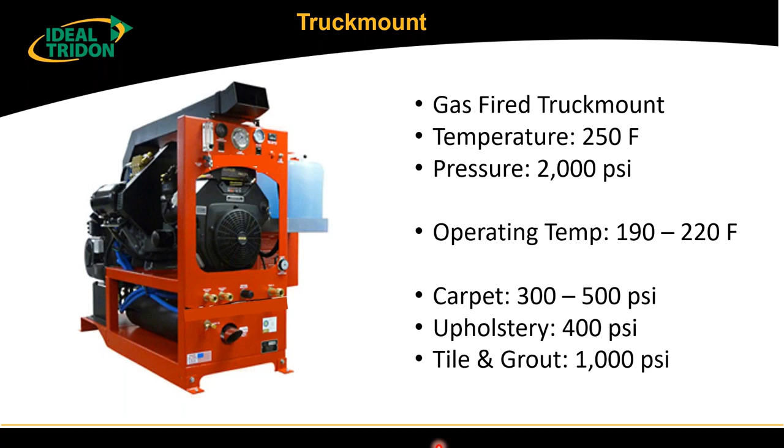So I'm going to lead you to the Holy Grail today, and we got some exciting stuff, but it may not have been the one that you were truly in search of. But in the carpet cleaning world, this is golden. And if you kind of see this and understand this, you'll understand the mindset of the people out in the industry. So for every 18-degree increase in temperature above 118 degrees Fahrenheit, you double the water's cleaning ability.

So what that means to them is the hotter the temperature, the faster I get the job done, the more customers I see, the easier that the work is. So they want it to be easy. They want to be seeing more customers, collecting more revenue.

So just to put that law into perspective, if they bump it from 118 to 136, they double their cleaning power. If they go to 154, they double it again over 136. So if you take it all the way up to 250, that's 64 times better than 118 degrees Fahrenheit.

So now you kind of see these maniacs out there, they want hot temperature, they want this pressure, they want to get that job done, get it done fast, have it done good. So some will be extreme on the temperature and pressure. Others will say, let's get an optimum setting of pressure and temperature, because the hotter you get, the potential that you have for an accident if a hose bursts increases. And somebody could get hurt, or hot water at high pressure sprays out and causes damage. So there's different ways that people operate.

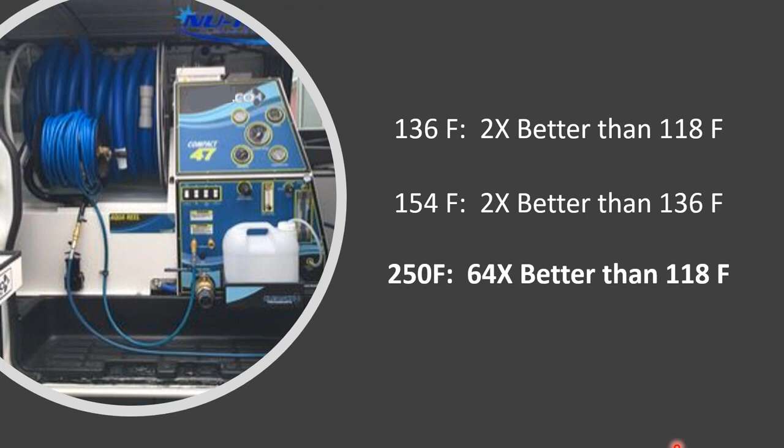So here's our truck mount mobile van, wanting to park as close as they can. Sometimes it's in the front, sometimes it's in the driveway. They want their lines to be nice and straight so they get better pressure and temperature delivered on site.

So here's our hot water line, and there could be cleaning chemicals in there. It's pressurized, if it's at 500 PSI. One of the popular hoses they use, it's an excellent one, is the Goodyear Neptune 3000, called the solution hose. There's also one for washdown, but this one goes to higher pressures and up to 250 degrees Fahrenheit. People like this hose because it's lighter, more flexible, and non-marking on the floor. You don't want to be causing damage to the floors you're cleaning or other items in the residence or commercial building.

So what's at the other end of this solution hose? Well, that's what they carry into the farthest room they're going to clean. It's called a wand. That's where the solution or high pressure water comes in and gets sprayed onto the carpet down below, and the return vacuum line sucks up the water that was placed on the floor. So this goes down to the jets, we've got a handle here. Notice the valve actuator is rated 1200 PSI, and our plug on the quick connect is more than twice that rating.

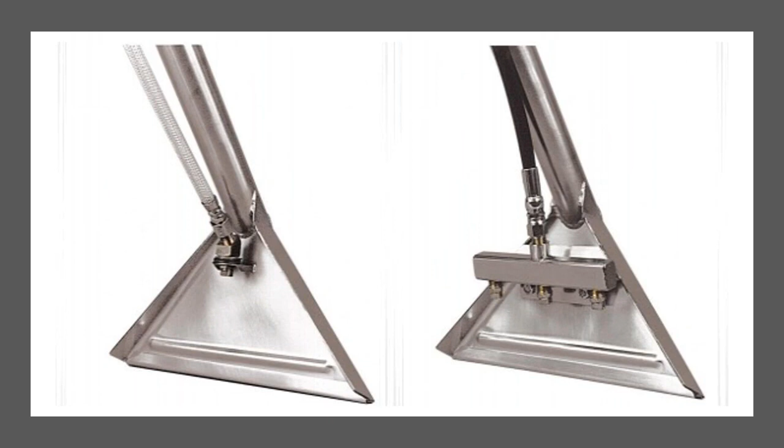One of the things with a truck mount, you can imagine if you use a lot of water, it's a little harder for the machine to keep up with maintaining the temperature. So people can be heavy on the trigger and use a lot of water. Here's a single jet, there's also double jets, this one is showing 3 jets. With 3 jets you're spraying more fluid, covering the carpet faster, but consuming more water, so you need to maintain the temperature. That's where a truck mount is really good, having a better pump and better heating, and that's why it gets the best results in many cases.

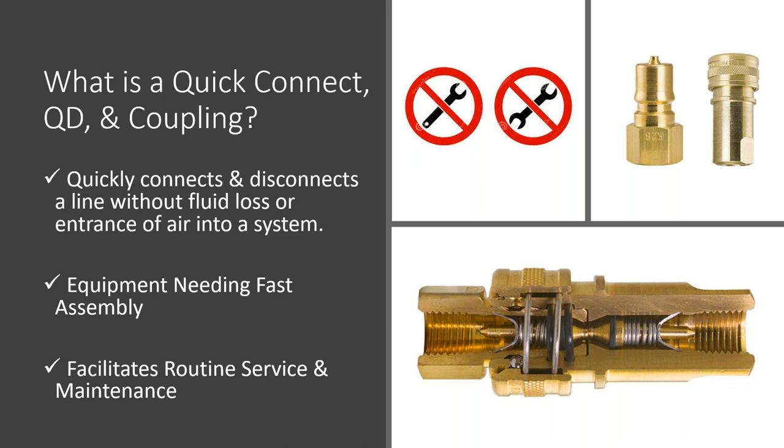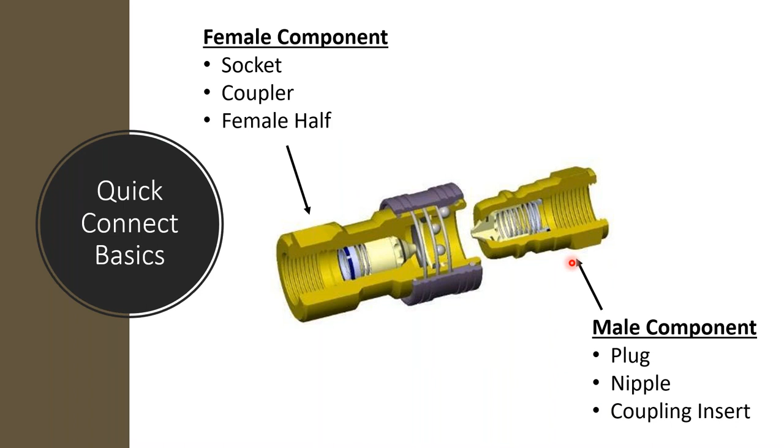All right, just so we're all on the same page with nomenclature, we'll do a couple of basics. There's two components in the quick connect. Here's the female component, goes by a variety of different names, a socket, a coupler, a female half, it's all kind of the same thing. The male component, which is the plug, the nipple, the coupling insert, those are some of the different names you'll hear used.

In our case, we're going to talk a lot coming up about the ISO-B coupler. It has a shutoff, or a valve, in the socket. Here's the valve, and it has a valve over in the plug. So right now when it's disconnected, if there's any pressure or water over here, it's not going to flow out onto the ground because the coupler is closed when disconnected. When they're connected, by retracting the sleeve, you're able to insert the plug, make a connection, and you got a secure leak-free connection.

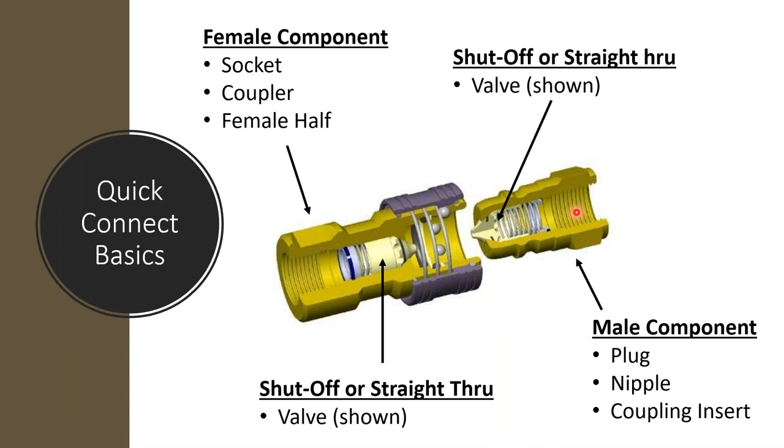Now don't let the name fool you. Hydraulic quick connects, it's not just used for hydraulics, but that's just kind of how it's named. So in the carpet cleaning industry, yes, they're using a hydraulic quick connect. The important thing is you select your temperature and your media so you get compatibility and the pressure is suitable for the quick connect. So you could use a hydraulic quick connect for air, liquid, many other things besides hydraulic fluid.

But our ISO-B coupler is a double shutoff. It prevents spillage when it's disconnected. And right here with it connected, each valve or poppet, they push against each other and they create an opening for flow.

And we're going to talk about the straight through coupler, which has no valving inside of it. So when you remove all of the valve and the poppet, you have much higher flow. And so when a person needs a high flow, they may remove a valve or two.

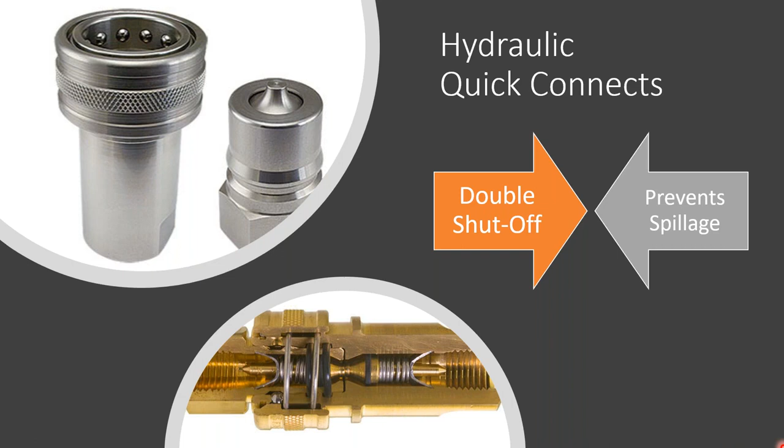And in the case of the ISO-B, there are locking balls that secure the plug when it's connected, and it attaches and grips right into this little trough right here and gives you a secure, leak-free connection for the quick connect.

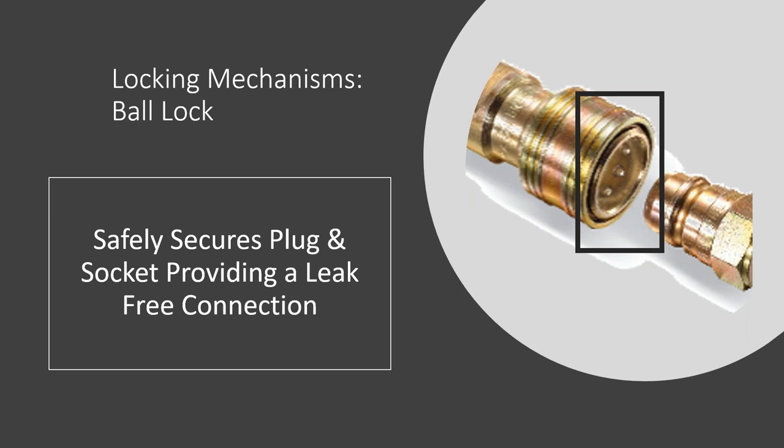All right, so now we're looking at our two brands that we offer. Our Foster USA made and engineered design brand is done out of Springfield, Missouri. And that's this product right here. So here's our socket of our ISO-B, Foster USA. You'll notice it has this unique look to it. And over here is the Breco, which is our import brand. It has a tapered body over here, so it's a little more slender. The Foster's been working out with Arnold, you know, pumping some iron.

But one thing about the people at Foster is they're in the Show Me State, and they want to see how things are done. So when you call up, they love to hear from you. They want to see how things are used. That's how we make a better product.

And so we're ISO 9001 approved to the latest standard. And I know you see 2015 on there. That is the most recent standard for ISO 9001. If you're an old timer like me, you probably remember when things were getting started, ISO was all about following the documentation. So if you made good product, you said you did it, and so forth, okay, you're ISO 9001 approved. You make bad product and you follow your procedures and you produce bad product, you're still ISO 9001 approved.

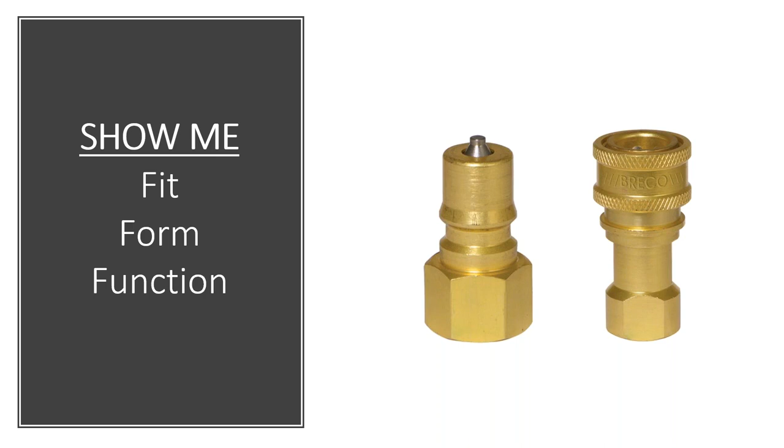All right, so now we're going to go ahead and go into the specifics of the product. Here's the Foster FHK series. It's an ISO-B coupler, and this is our USA-made product, made in the USA right there in Springfield. The sizes range from 1/8 inch up to 1 inch female NPT, SAE sizes up to 16. The pressure rating, depending on size or material, is 3,000 to 5,000 PSI. So just refer to the pressure charts, you don't need to memorize it.

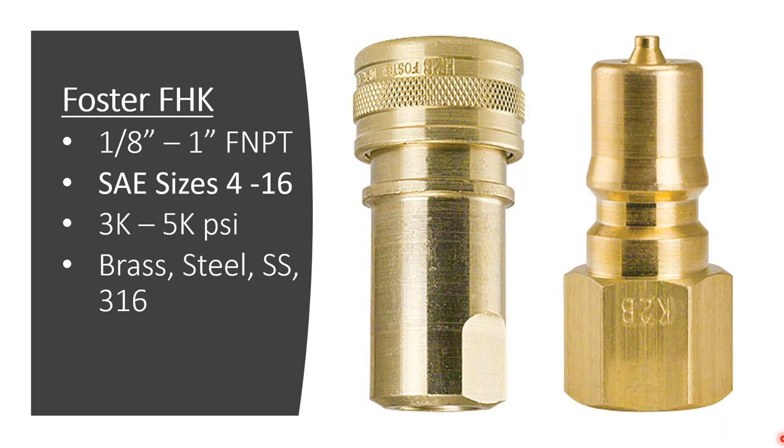Some people will choose stainless because it lasts longer. Some people have the mindset: I want to do less repair and maintenance, and so they always choose the best. Others are driven a little bit by cost or what gets the job done.

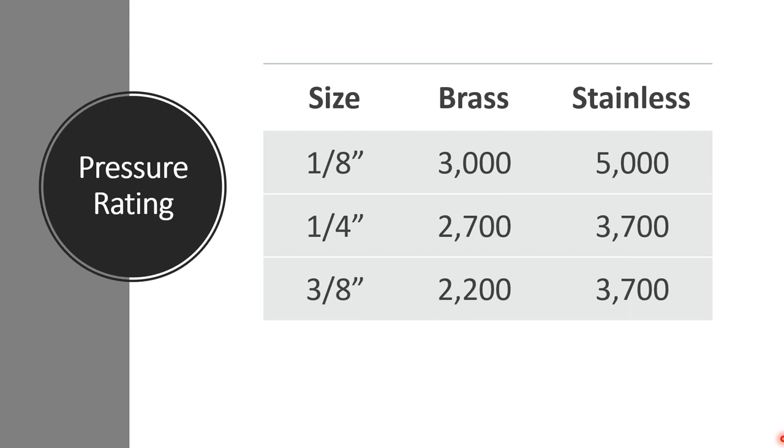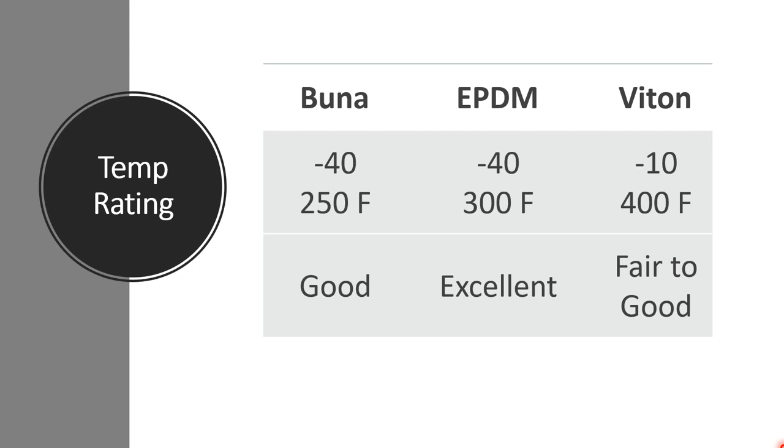And Viton also gets used a lot, up to 400 degrees Fahrenheit. So for hot water and steam, EPDM is the best. Viton could be fair to good, and sometimes not recommended for steam. But we do have customers that use Viton quite a bit, and when certain solutions get added and they know from experience that it works well, hey, that's great. But if all you're doing is looking at temperature rating and trying to think, I want the one that goes to the hottest temperature, you may want to think about media compatibility.

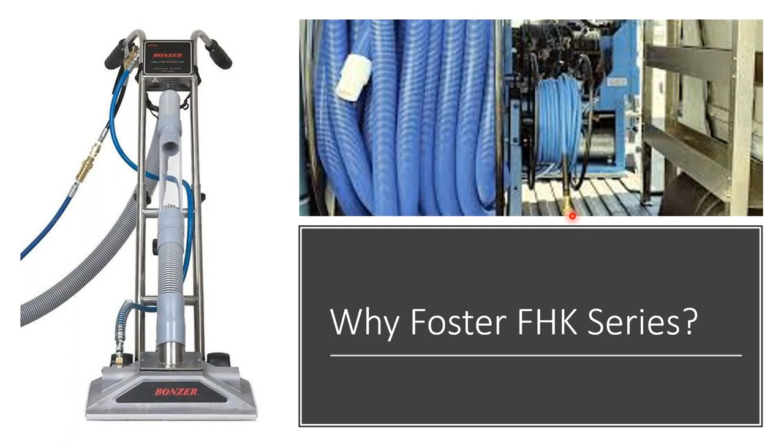Why Foster FHK series? We want to have fast, reliable connections. So we're assembling our line out in the residence or the commercial building. There's a nice quick connect right there on the hose reel. We want fast, easy connections. We want it to be reliable. Foster is known for quality, longer service life, rugged and durable.

This particular gentleman from this company, I met him at a trade show. He happened to be the owner and designer of the equipment. We're talking about it, he's telling me a variety of things, how it operates, and I'm learning some pretty cool stuff. Then because I'm from Foster, I said, well, how are those Foster Quick Connects working for you? You got three of them. And he goes, they're great. They last longer than anything I've tried. He goes, I tried going at an inexpensive route like the import stuff, and I've used some other ones in the industry, but the Foster lasts the longest and can be over twice as long as the other items I use.

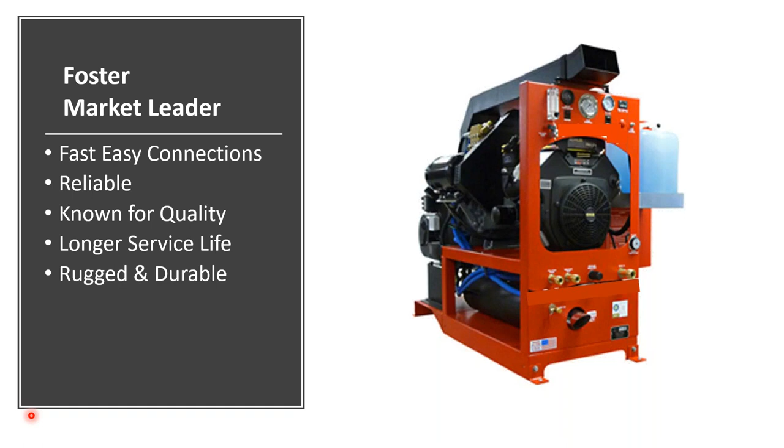So can you imagine, I'm selling this $20,000 piece of equipment, and the thing that the operator does every single time, multiple times a day, is connect up to that equipment. And if they're putting inexpensive, low quality product up there, every time they use that $20,000 piece of equipment, they're getting a bad experience. So that's why it's great to use a high quality product.

One thing that Foster does that no one else does is we have a much larger contact area of the locking ball. This is that locking ball on the sleeve that locks the plug into place. So we have a big contact surface area all around the ball, where our competitor has a point contact that contacts it in a very small area. Well, what does that mean? The competition has less wear resistance and shorter life and high force being applied to a small area, and it also makes the hoses harder to swivel.

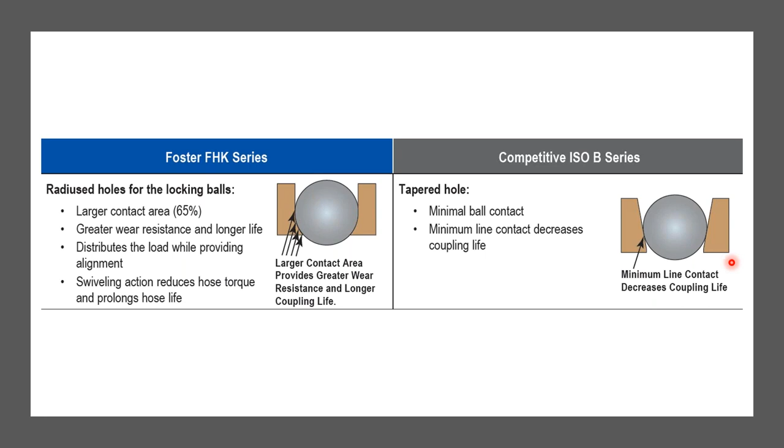So what does that look like? There's the metal area that's supporting the competitor's ball. That force is concentrated on a super small area, and so it has a lot more stress. It's flattening that ball out so it doesn't roll as good. What does that mean? The sleeve is harder to retract, harder to connect, and sometimes you can't disconnect it. And then it's leaking and it's not working properly.

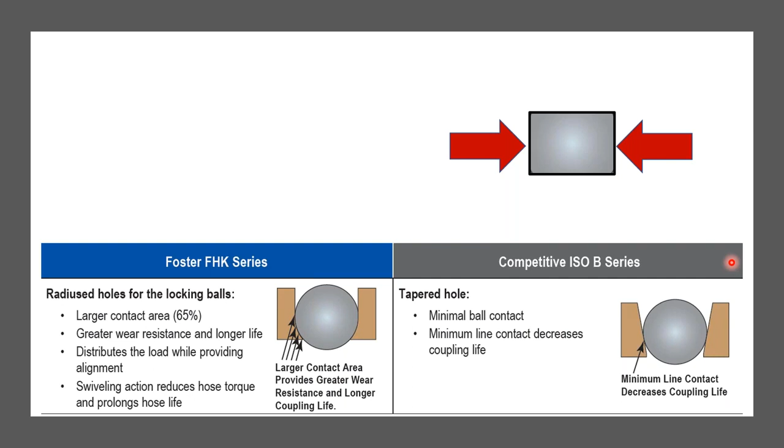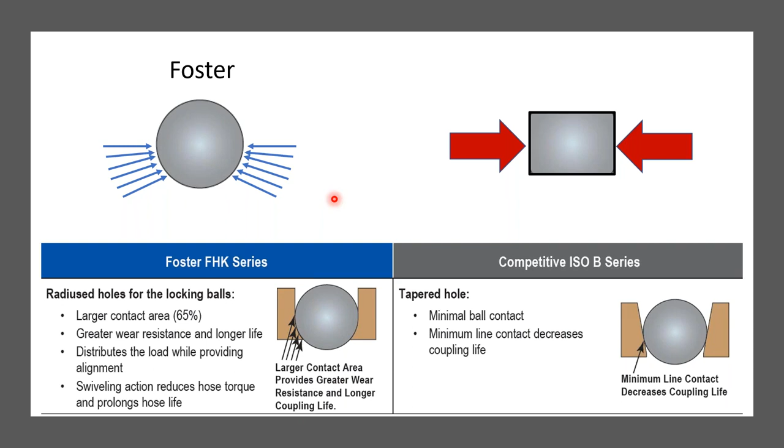But on the Foster, you'll notice this curvature right along here on both sides. What that does is it divides up this big force where it's damaging in an area, and it puts much smaller forces and distributes the load so that the ball maintains its shape. So you get good smooth sleeve retraction, easy connections, leak-free connections, much longer than the other quick connects on the market.

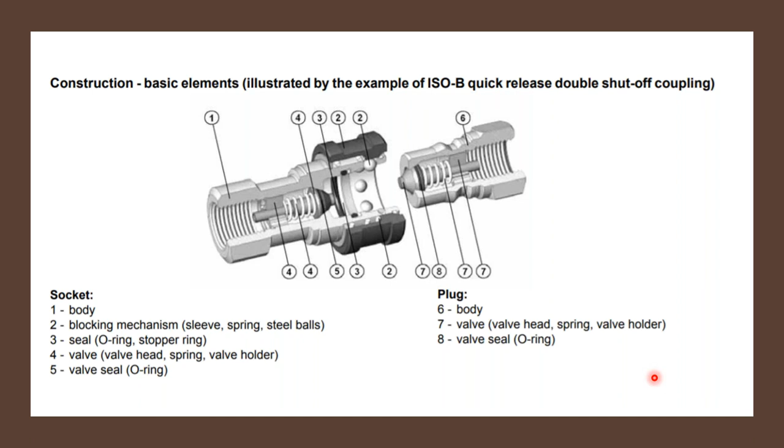Right here we're looking at a common design, and this is another manufacturer out there showing how they designed the Quick Connect. I highlighted the most important part, which is the sealing area of the Quick Connect. Number 8 on the plug, valve seal, O-ring. Number 5 on the socket, valve seal, O-ring.

Well, what's so bad about having an O-ring on the poppet? Well, it's in this cavity, and if you have high pressure, dynamic pressure, where it goes from low to high and high to low, high velocity, that O-ring wants to jump out of that groove. It wants to roll, it wants to twist, it offsets, it's not sealing in the same position every single time. Pressure gets behind the O-ring, kind of expands it a little bit. So it's not as good performance as the Foster design. And some people, yes, they'll crimp that O-ring in there, put stress on the O-ring, which can damage a certain area, which does sealing. So it's not an optimal way to get the best performance out of the Quick Connect.

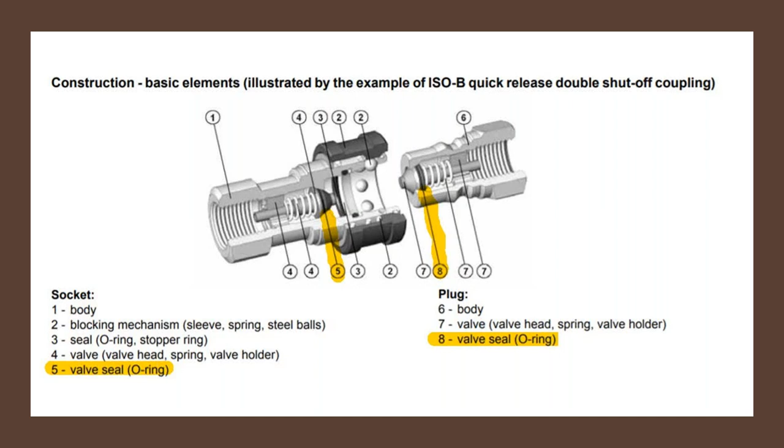Oh, you know those Foster design engineers, they say no a lot. They're kind of a little bit unruly. And you know, they say no rotation, no rolling, no stretching, no offsetting.

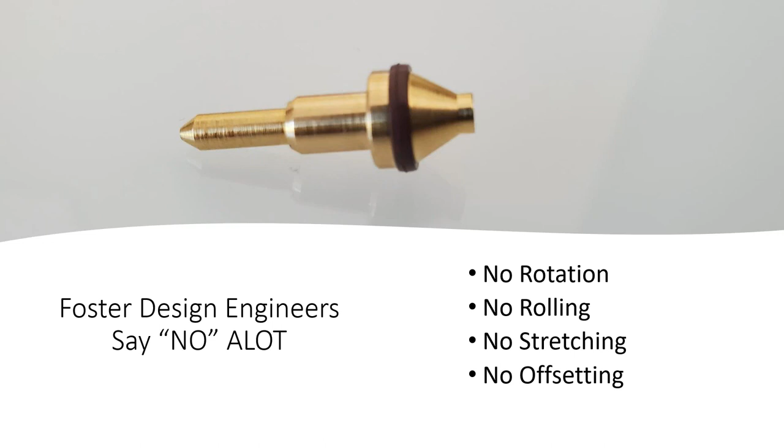And they're saying no inferior performance. And you know what? They would be happy to hear from you. They always love hearing from the customer, so don't think that they're a bunch of old grumps out there. But they're great designers, and they have a lot of practical experience with Foster being around for about 75 years.

So what we have up here is a 3-piece assembly. We have a 360-degree conical metal seat that guides and self-aligns going into the body. This seal right here is not an O-ring. It has a much smoother finish, and it's held in place by this sleeve. So when this seal goes to get installed, you can't roll it over this ramp because it's like a washer. It has a small diameter. It keeps it centered on the poppet rod, which would be this right here. And it's not going to roll. It's not going to twist. And this piece right here is wedged into place. So this seal is locked into place. It's not going anywhere, whether it's high pressure or high flow.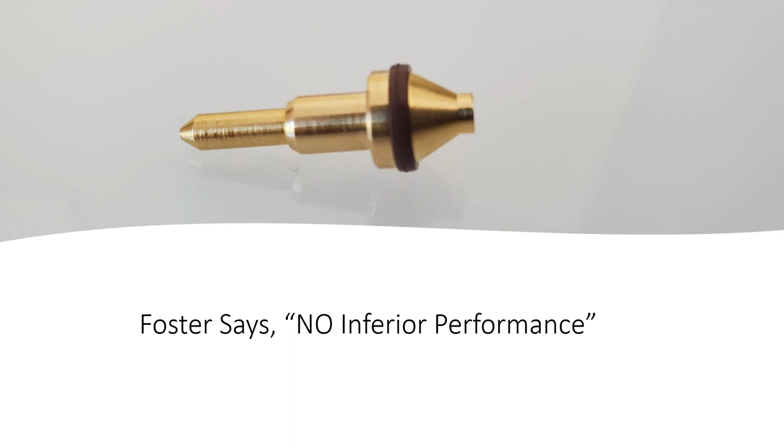In fact, in the trench shoring industry, they were using a competitive product, and they had a bad safety situation where they disconnected the quick connect at high pressure, and what it caused was the O-ring to roll out of the valve seat due to the high pressure. So when they went to ours, they eliminated that problem. So with our Foster design, that's a superior valve seat.

So the advantage goes to Foster. You get enhanced sealing performance. And because of that design, we're the only people who have a vacuum rating. Other people might refer to vacuum service, but they don't stand behind their product and supply a vacuum rating. Because once you put the rating on there, it has to perform to that level of performance.

We got our 360 metal-to-metal valve stop that enables us to get the quick connect to fully open each time. We've redesigned our 1/8 inch, so we have 37% higher flow than anyone on the market out there. As a standard, we use a kick spring, which is stronger force to help ensure good shutoff and faster shutoff, where maybe some competitors only do that as an option and some don't do it at all, but you pay more for it when you're getting that option.

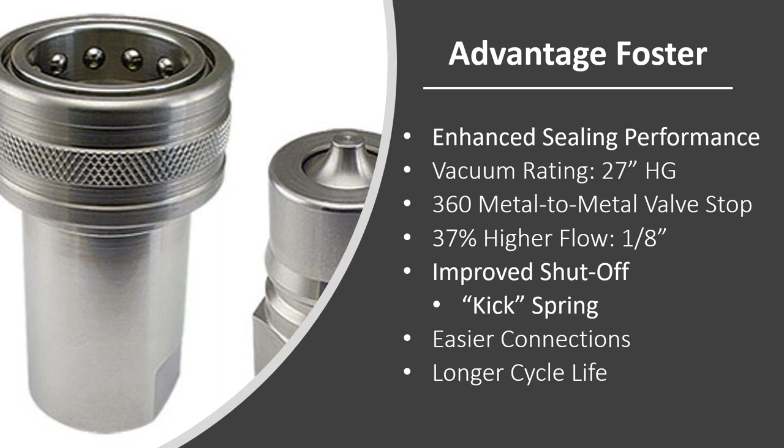So Foster, easier connections, longer cycle life.

We also have a lot of product on the shelf, but we're also great at fast delivery when you're doing like a stainless valve internal, mixing different seals that aren't the ones that are normally used. We can do like 100 pieces in 1 to 3 days and up to 1,000 in like 3 to 5 days. When you're getting to 1,000, it's good to check just to see how the factory's doing. It might go to 7 if it's an extremely busy period of time, but we manage it very well, and we can get out a lot of product that isn't normally stocked throughout the industry faster than others.

So with the brass, you get standard stainless steel locking balls, stainless spring, stainless retaining ring, and as I inferred, you can also get a brass quick connect with the stainless valve and all kinds of seals.

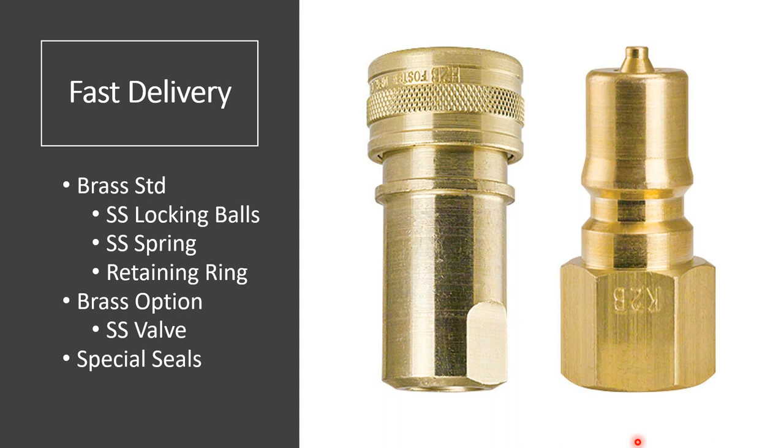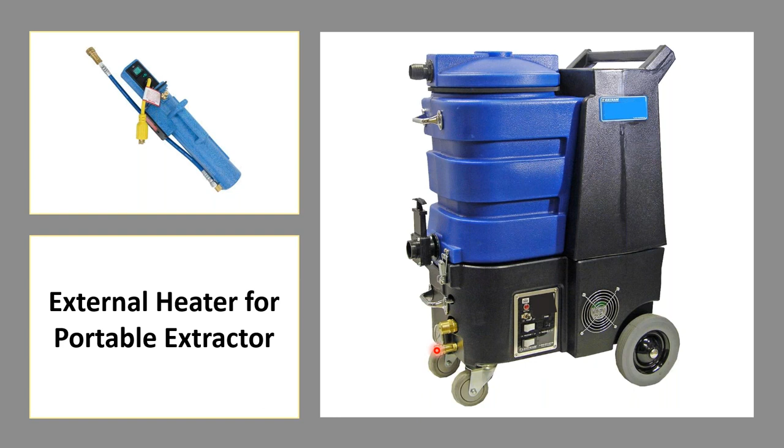So some of the portable extractors will have a heating source in it and some won't. So what you see up here is a manufacturer using a Foster USA made quick connect on a heating element to help produce heat in a portable heat extractor. And this time you see the quick connect is in the front, nice Foster quick connect right here for the solution hose. And here's another manufacturer using the Foster USA design on their heating element with the Foster quick connect here and the plug in the back.

Now, what happens if it's too hot to handle? So you saw, hey, that machine goes up to 250. You might have some rogue operator going hotter than that. It doesn't have to be that hot to be too hot to handle. I don't want to touch something that's 200 degrees. I don't really want to touch something that's 150 degrees. So the solution hose is insulated with the cover, but when you go to touch a metal part, if it was 200 degrees running through the solution hose, well, that coupler is going to get close to that temperature. And even if there's a drop on the outside of it, I still don't want to be touching that.

Yeah, there we go. We have the insulated sleeves. So that shields the worker from a hot surface temperature, because that's performing the insulation like the solution hose cover. But what's cool about it is you can use the red one for a hot line, the blue one for a cold line. We got information from a distributor that we like to thank, and we designed a yellow one for Stanley Steamer, and we also do black. So black and blue are probably the most common.

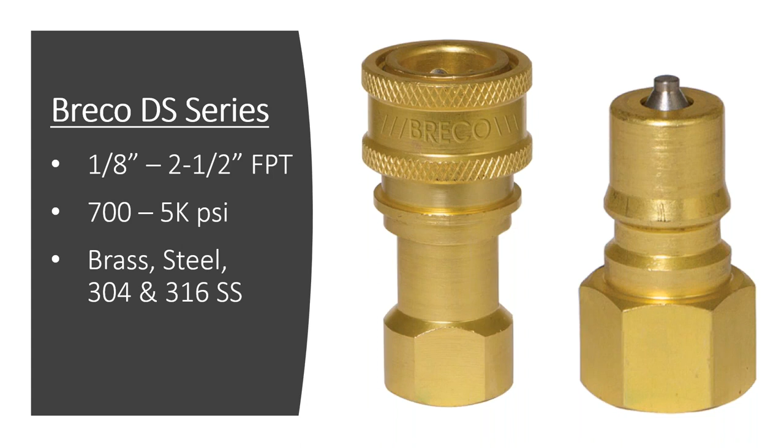So now we'll look at the Breco carpet cleaning import coupler. It goes up to 2.5 inches. The pressure rating from 1/8 inch to 1 inch is exactly the same as the Foster when you're matching seals and like material. The reason it's 700 is when you go up to 2.5 inches, pressure generally drops the larger the system.

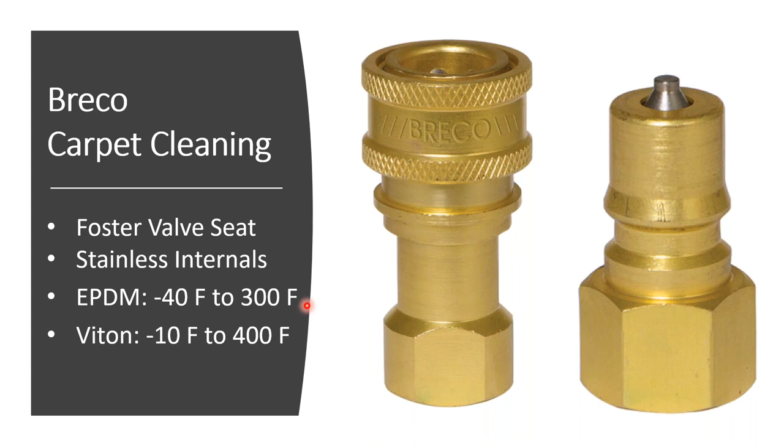So I can't believe it, but we put our Foster engineered design valve seat also in our import coupler. So this import coupler is giving the best performance out on the market, lasting longer, and getting better shut off, whether it's vacuum or high pressure. It comes standard not only with the locking ball stainless, the retaining ring, and the spring as stainless as standard, but you also get the valve poppet in the 1/4 inch, and both the socket and the plug is stainless, and it's also available in EPDM or Viton.

And yes, it comes with the insulated sleeves. One user was using the yellow for warm lines, the blue for cold lines, and the red for hot lines. But in any other industry, what a great way to use a color-coded line so that you're connecting the proper line to the proper source.

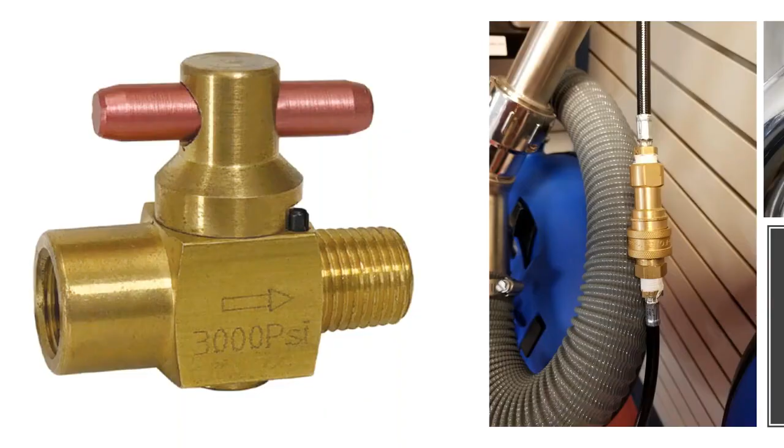We have a plug valve, and it provides fast on-off service just like a ball valve. 1/4 turn, quickly gets you up and running. But what's different about the ball valve, or the plug valve, is that it goes to 3000 PSI. We put EPDM seals in it as standard, so it's great for the carpet cleaning industry. And they like the 1/4 inch female by male connection because it eliminates a pipe fitting when they're hooking it up to the system. Remember that solution hose on the truck mount where they had a valve, then the quick connect? 3000 PSI.

What's different about the plug valve is that it also has a little channel that vents whatever gets trapped when the plug valve is in the closed position. So if you had hot water and it's out in the Phoenix sun and it's expanding and pressurizing, if it was used on a vent line and you open it and the user stood in front of it, that's kind of a dangerous situation. So that channel vents out that fluid so it doesn't cause a problem.

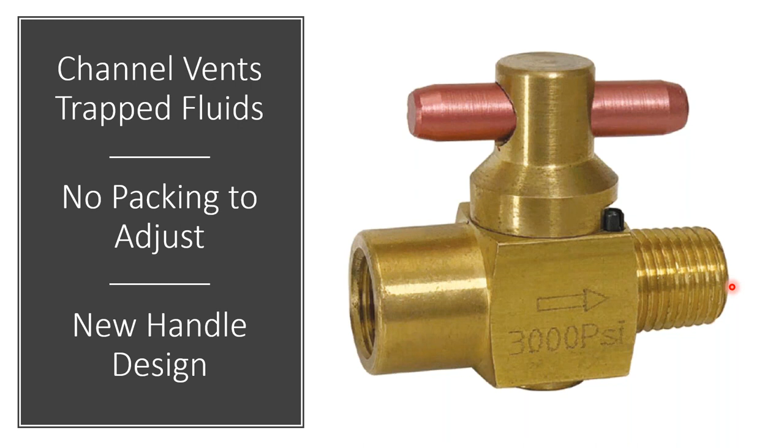There's no packing to adjust, and we have a new handle design that has a channel that better secures the handle in place. You'll notice the plug valve has a flow arrow, so flow goes in the direction - here's your inlet, here's your outlet, up to 3,000 pounds. You could have reverse flow and pressure from the opposite side, but you don't want to exceed 50 PSI in a reverse flow condition.

We've also added a 1/4 inch male by male. It can be used in carpet cleaning for people who like to use the male by male setup. It has Viton, so it could be used in carpet cleaning, but this one is used a lot in trench shoring.

So let's look at an application. Here you see the plug valve in action on one of the control panels of a truck mount. You see some other valves, flow meter, or pressure indicators for vacuum, for the return line, and the solution hose, which we see right here. Got a Breco quick connect, plug on there.

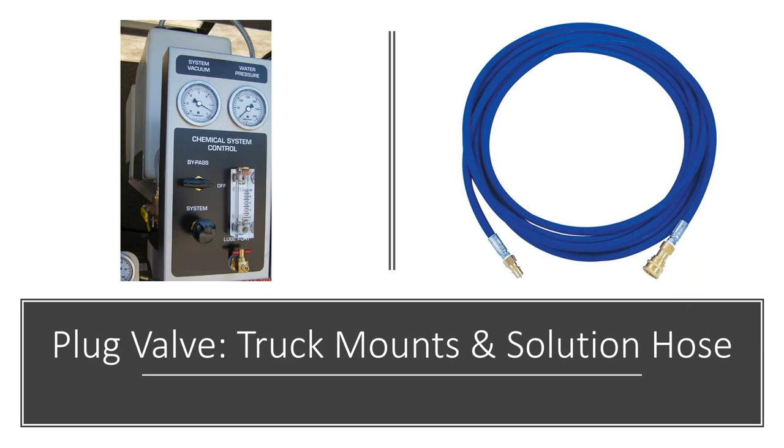So here's an idea. Our plug valve is a little bit newer, it's being used out there, but here's an application just like on that truck mount. They have a ball valve. Why do you need a ball valve when you have a quick connect that automatically shuts off? What if I want to take this off when I take this off and I have trapped residual fluid in here, it might be under pressure, and now it's going to want to spurt out uncontrollably. But if I have a ball valve, I can keep it closed, and I can take the quick connect off and maintain a leak-free setup, and then dispose of the fluid when I'm ready.

Here's another potential application.

On a portable heat extractor, you see a ball valve. There's no packing adjustment on this ball valve, so as the seat wears, you can't adjust it, where the plug valve is using an O-ring that's maintaining the adjustment on there. It's also got a way safer pressure rating. Some of these might be 300, 500, and maybe 1,000 PSI at the top end, but people are using the lowest pressure rating on the higher pressure applications.

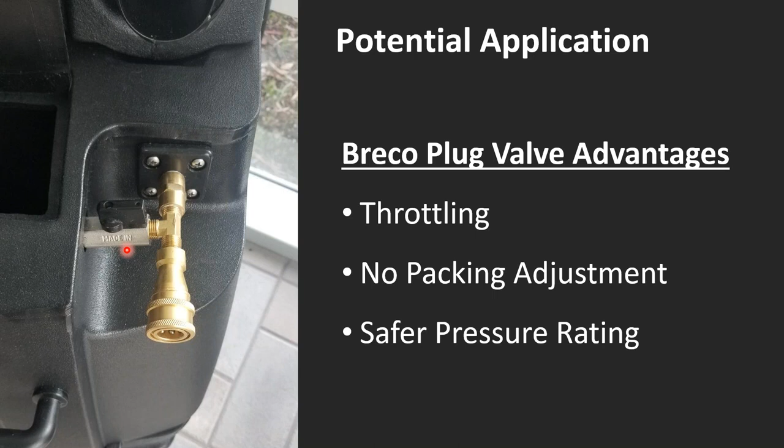When it comes to coupler selection, here's a little acronym that I find pretty useful. I know there's one for hose assemblies, STAMPED, which is excellent. This is kind of the same thing: TEMPS. That's what we want to remember. What I like about TEMPS is it asks quick, fast questions in the beginning, and then at the end you spend most of your time talking about the service and the application.

First thing, temperature. What's your temperature? 200F. What's your end connection? It's female NPT. Okay, what size is it? So I got my size. Well, what media do you have? I have hot water going through it. Okay, and the pressure? Oh, it's 500 PSI.

I have all of those stats right now to select my quick connect, but now I want to ask about the service. How are you using the product? Have you had any problems with what you're using? You want to ask a lot of questions, because that's how you find out how to optimize what they're doing.

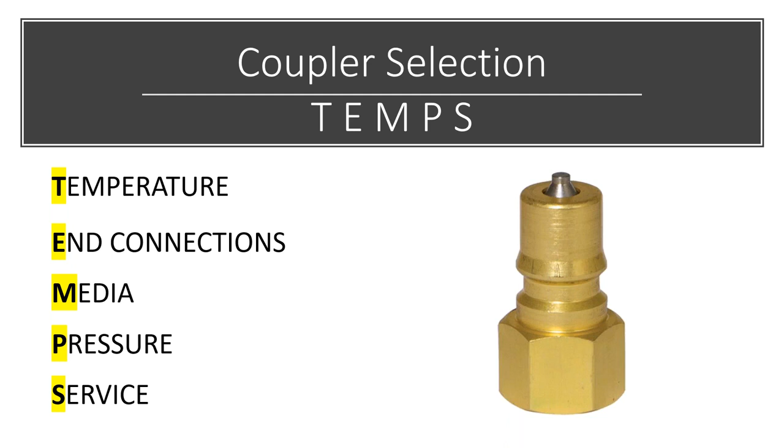They might say, hey, when I go to the residential place, I need to hook up to their water line, and it sure would be nice to have an easier product that allows me to disconnect the two easier and faster. Okay, now we got the quick connect for the garden hose.

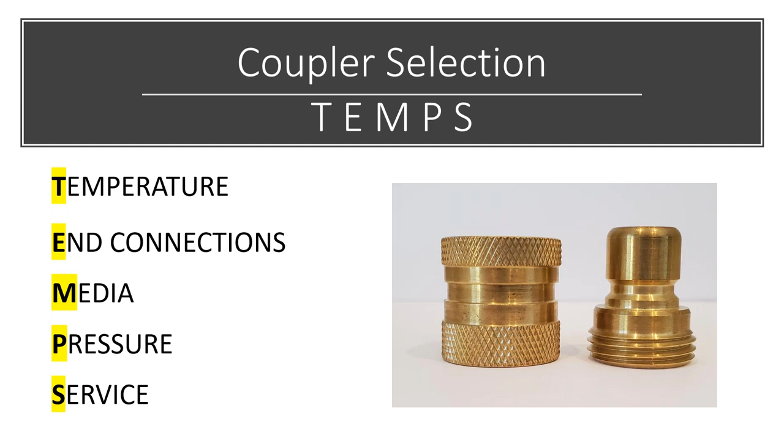Maybe they tell you, hey, I noticed when I went into the place, I dropped the solution hose and cracked the person's tile. Or I dragged that solution hose across the place and they had a real nice fancy wooden floor and I scratched it up. Well, that insulated cover is going to be more gentle on the floor surfaces, and it protects the heat.

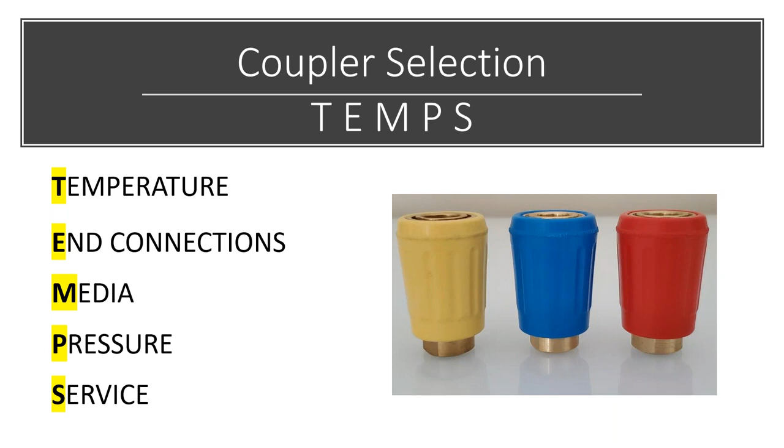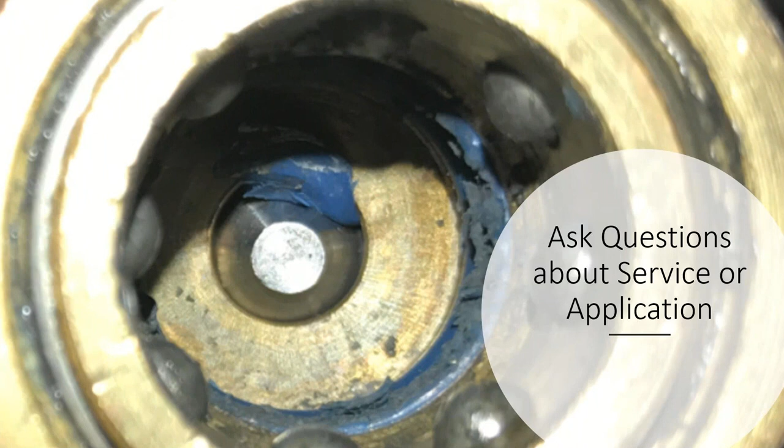So that's where you want to spend a lot of time on service questions. Like in this one: hey, what the heck happened here? We had extreme heat. Is that your normal operating temperature? It is? Okay, well, we better select a different material, because when you disconnected this solution hose, the quick connect couldn't shut off all the way. You see an opening right here. So we had 250-degree fluid coming out of the solution hose, spraying onto somebody. Well, that's not good.

Remember that valve in the previous position? That would work out pretty good. Or it could be, hey, I had a failure on the truck mount. My thermostat went out, and I had an uncontrolled temperature rise that caused damage throughout, like on the hoses and the other components. So ask questions about service and application.

So here's that idea. When they went to disconnect, if they had this, they could have had the Breco plug valve. They put it in the closed position, and that gets rid of the residual pressure in the coupler. Now when they disconnect it, the coupler shuts off. So you have two shutoffs right there, kind of a backup.

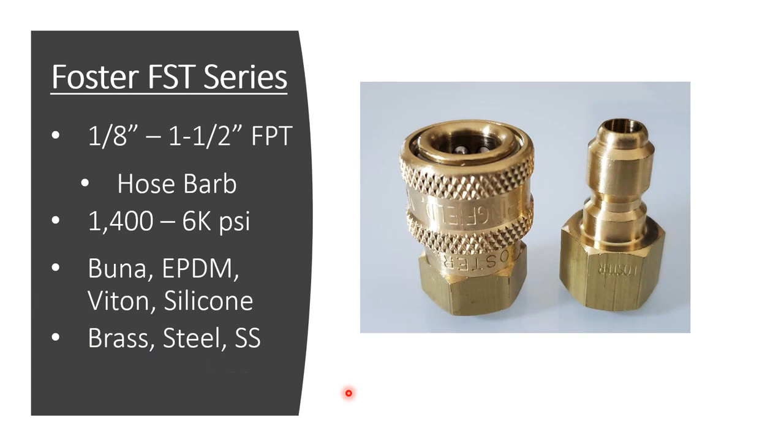Straight through series are also used for carpet cleaners, and they're also used, as you know, in your business for power washing. The Foster USA made product goes up to 1.5 inches female. We also have a hose barb up to 6,000 PSI and a whole host of seals, even more than you see here. These are our materials: brass, steel, stainless.

The workhorse for the carpet cleaning and power wash industry is right here: 1/4, 3/8 female connections. They also like male connections and the corresponding plug, but they'll also go up to 1/2 inch and 1/8 inch. Foster was the first manufacturer to do 1/8 inch, and we're the standard used in air rifles.

So the users are going to be using mostly brass. And if they need high pressure or the best corrosion resistance, or the person who has the mindset that they want the longest lasting product, they're going to be choosing stainless.

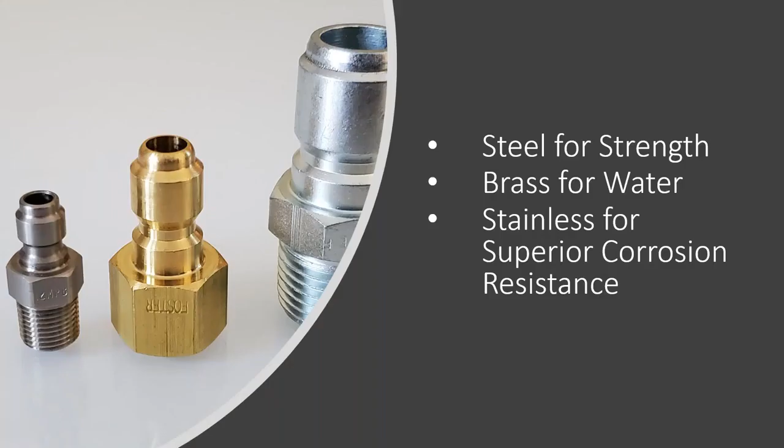Here's the stainless product right here: brass plug, steel plug. Use steel for strength, so when the locking balls come in here, it's not deforming the area. Brass is softer, so it'll mechanically wear out faster than the steel. But if you're using it for water or you need better corrosion resistance, choose a brass plug. And if you have real harsh chemicals, go with the stainless.

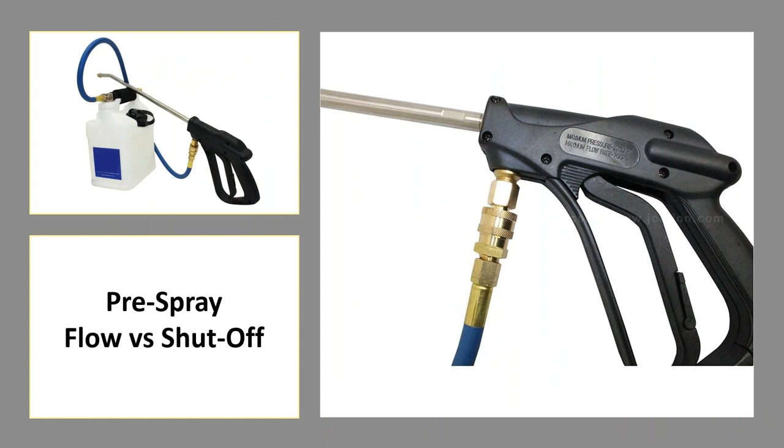There's a lot of pre-spray injection sprays in carpet cleaning, and also in the agricultural market. If they need high flow, they want to use a straight through quick connect. But if they need shut off, they want to use an ISO-B.

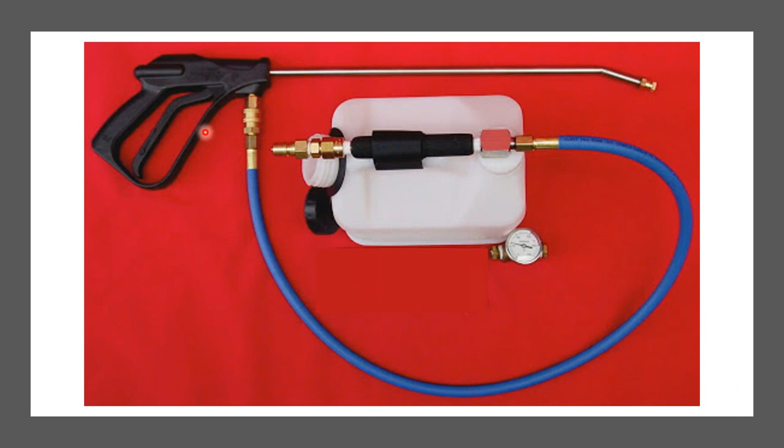Here's an injection sprayer. They're using both. They keep the handle attached to the hose, and they only disconnect the solution hose to the tank. So they want shut off so it doesn't spill on the floor. ISO-B double shut off prevents leakage, while the straight through provides maximum flow.

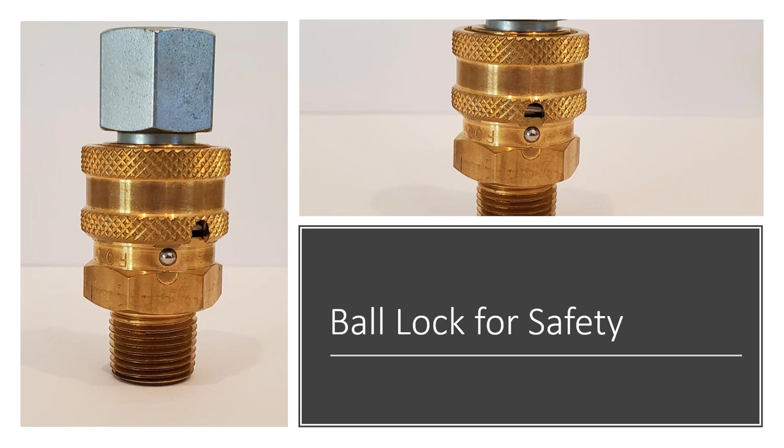Here's a nice little safety device you can get with the ISO-B and also the straight through: a ball lock for safety. When the sleeve is rotated, you can't retract the sleeve. So if you catch the sleeve on a corner, it's not going to accidentally disengage. When you want to connect or disconnect, align this notch with the locking ball.

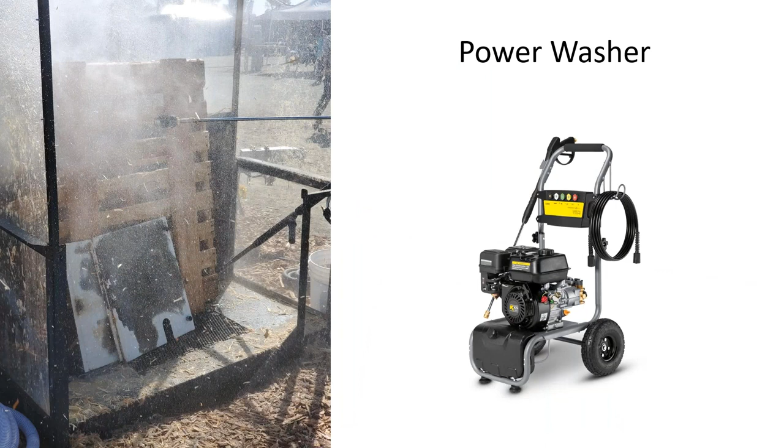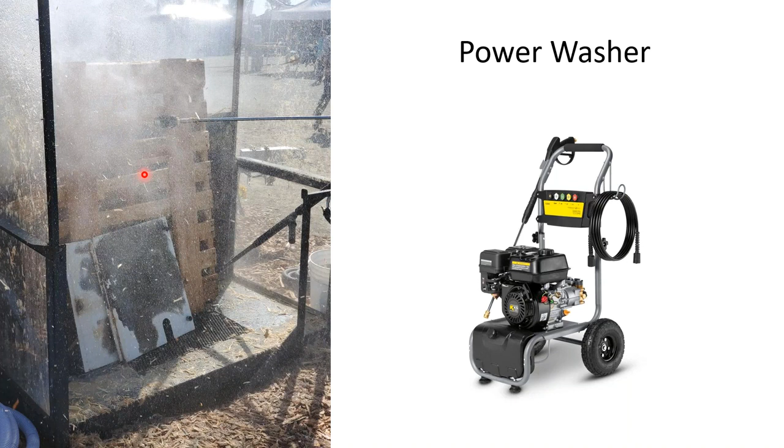Here's a power washer. They don't always use the locking ball, but they do in some cases. You can see the power of the pressure washer, and you got wood flying everywhere. It might be kind of nice to have a locking sleeve on the socket. And here's a pressure washer where they use a lot of the straight through quick connects.

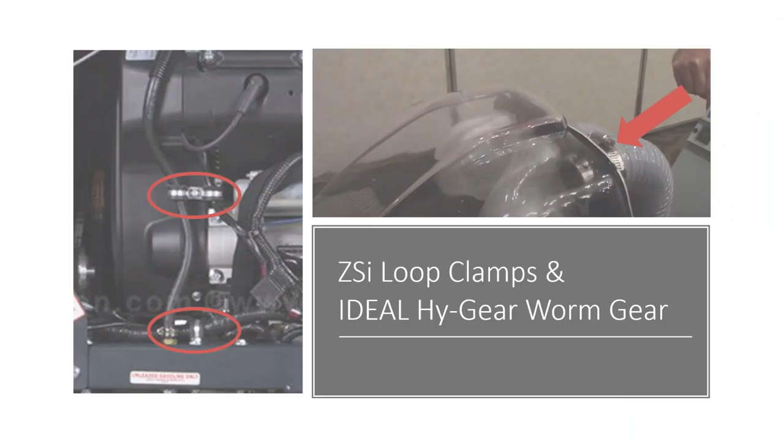We're going to wrap it up here with a slide or two. ZSi loop clamps get used on the truck mount systems. Inside the portable extractors, you see some of the EPDM loop clamps. We also have stainless, but steel gets used most of the time. And the IDEAL Hy-Gear worm gear clamp, here it is on a vacuum line right here. They'll use this also on other low pressure hoses that might be behind the truck mount panel or in an airline on the portable.

All right, if you have any questions, this is our next to last slide. And I want to pay a little homage to Brian, who really drove home the need for dust caps and dust plugs.

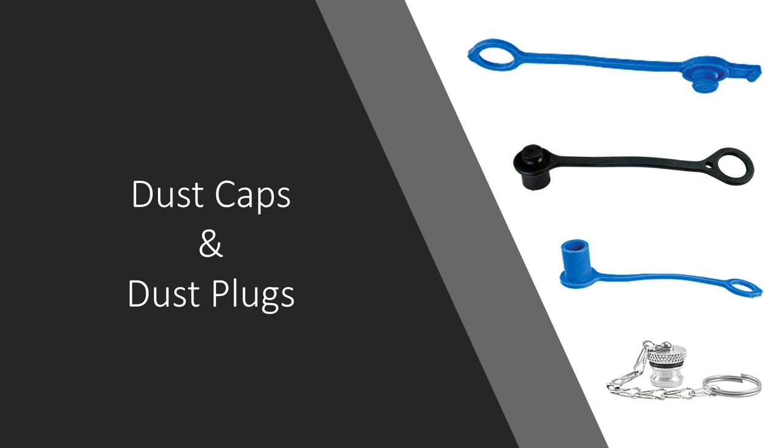So the ISO-B has a bunch of these rubber dust caps. One works for the socket, one works for the plug. Actually, this one right here is the double, so it works for the socket and the plug. While this one, you'd get one for the plug and one for the socket. And we also have it in metal. That helps keep the gunk out of the quick connect, and also protects the sealing surfaces.